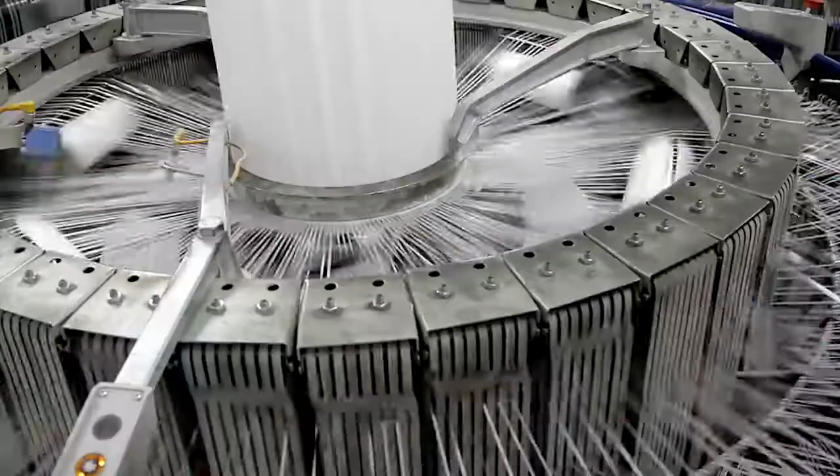Now that we've defined additive manufacturing and how it can be used, let's understand why it's truly important. In other words, why should we think differently using AM? Look around you and think of all the things that were made in factories, products from simple to complex, and imagine what it takes in terms of investment in infrastructure and time to go from the raw materials to the product arriving in your hands.

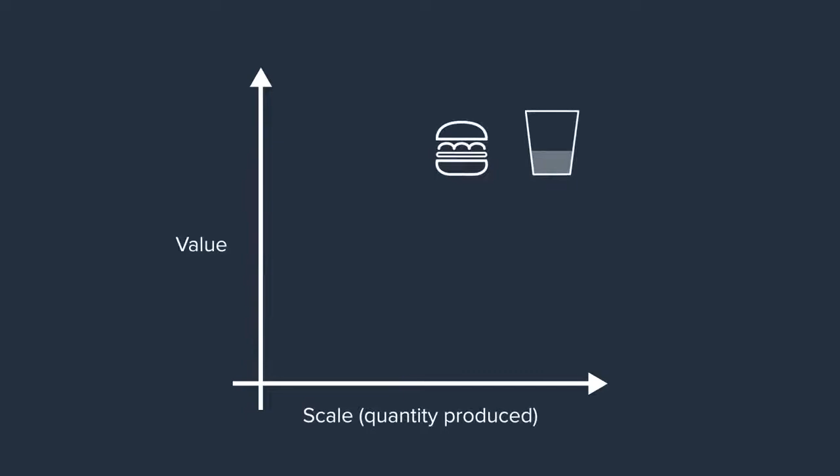I also teach the largest manufacturing class on campus at MIT, and every September on the first day of class, I ask the students for their definition of manufacturing, and then I give my definition of manufacturing as value at scale. This definition applies to bare necessities, food and water, to the most intricate electronics and advanced systems such as automobiles and aircraft that contain thousands of parts, both mechanical and electrical. And to bring those products to market, to not only bring improvements in our quality of life, but also to bring a profit to the manufacturer.

We have to manufacture in large quantities because of the investment in tooling and machines, and also the investment in design and scale-up that's needed for the producer to reach the marketplace.

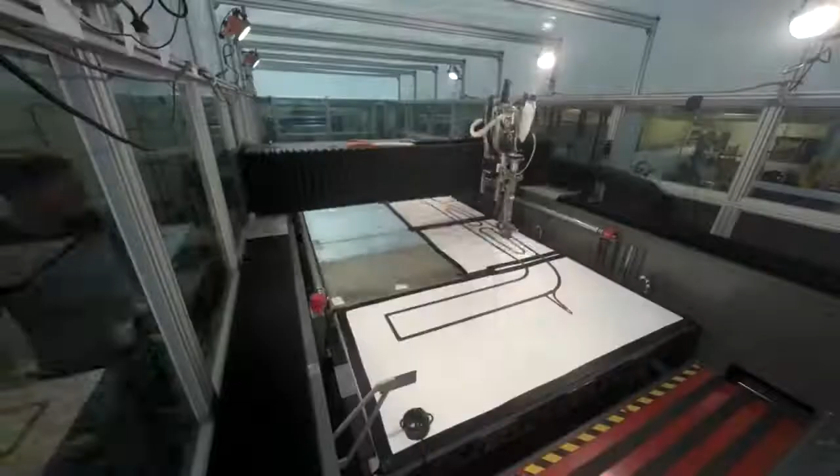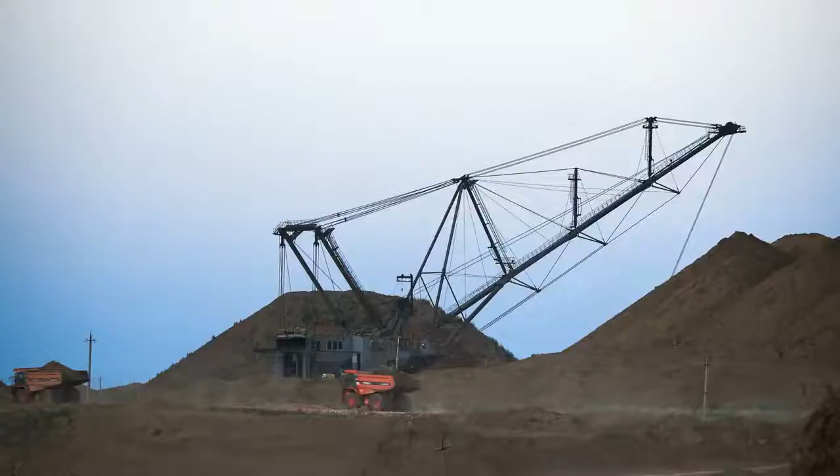Because 3D printing is unconstrained by traditional forming and machining methods, it introduces a lot of potential for savings. If you go back to aluminum billets, there's a whole bunch of energy that's put into mining bauxite and creating aluminum. And then you have to give it material properties, roll it, and then you start cutting it up into parts and pieces. There's all of these steps that happen when you really consider the life cycle of a traditionally machined part, and manufacturing from an additive perspective can really shorten that flow.

So that's why additive manufacturing is different. And further, it's widely said that AM has a flat cost per part versus volume curve. In other words, the cost per part is the same whether you produce a few or you produce many. Now that's not strictly true, but it's okay for the moment.

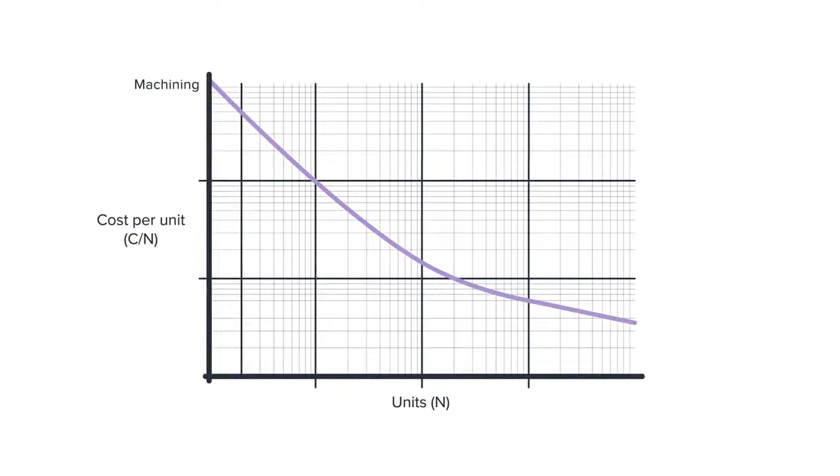For many years, the cost equilibrium point between a traditional route, such as making a part by machining or injection molding, and 3D printing it has been advancing, moving to higher quantities, and this will continue to advance, no doubt about that. So we can always compare the cost of making the same part by, say, additive manufacturing versus machining, but we can of course also leverage the design freedom that AM gives us.

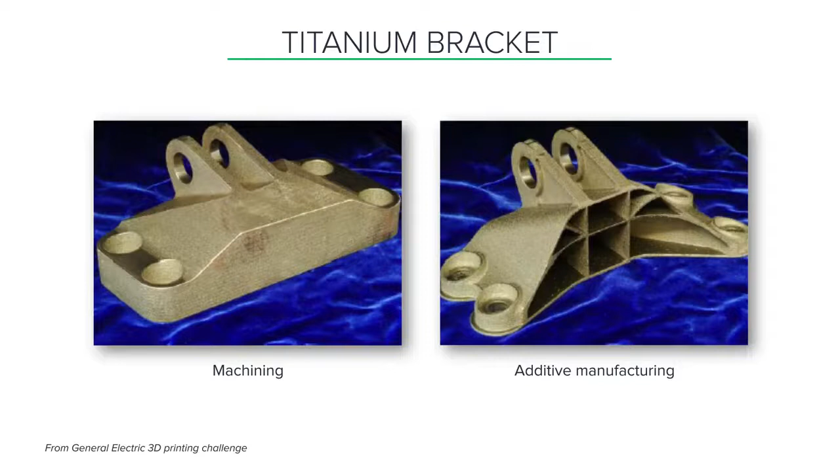A great example is this bracket for an aircraft application that was put out as a challenge by GE several years ago and got solutions from around the world. The challenge was to come up with a design for AM that saves weight and material, and the winning result among many really cool outcomes is shown here.

So for these and other designs by additive manufacturing, does complexity really come for free? That phrase is often used in the field, and I'd like to probe it in a bit more detail. So to do so, let's consider this series of parts.

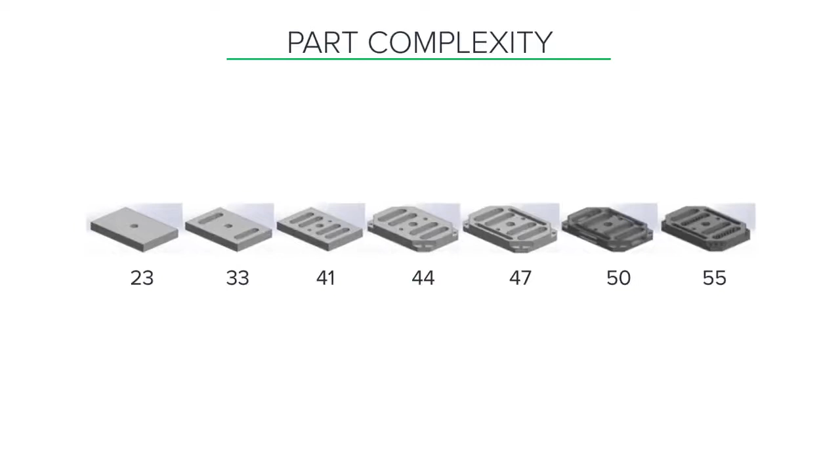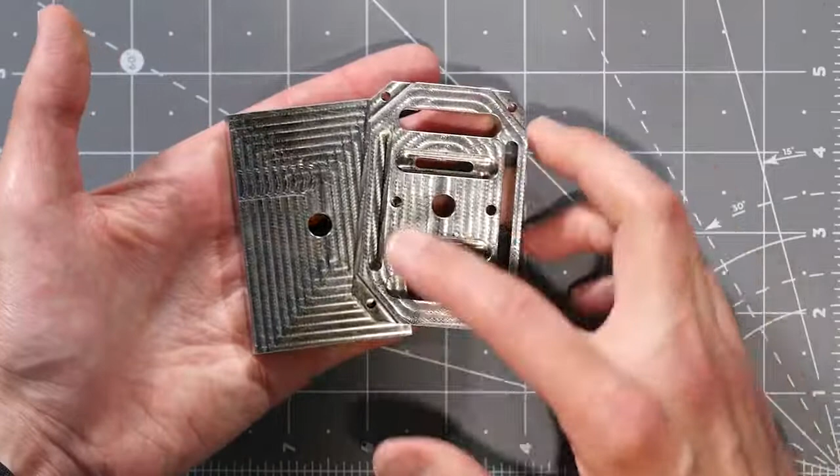The parts from left to right on your screen have increasing complexity and the same external volume, or the same bounding box. The simplest part here is a simple block with a single hole machined in the center, and the parts progress in complexity. An intermediate complexity has features of different shapes and sizes, all machined from the same orientation, from the top down. And if I ask an established machine shop to make one of each of these parts,

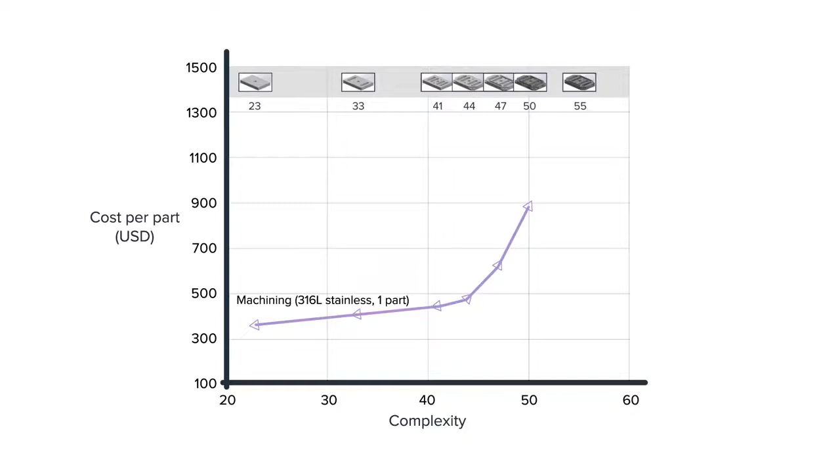I find that the cost increases with complexity. Obviously, because to create more features and remove more material by machining, I need more machine time, and I also need more involved machining operations and expertise.

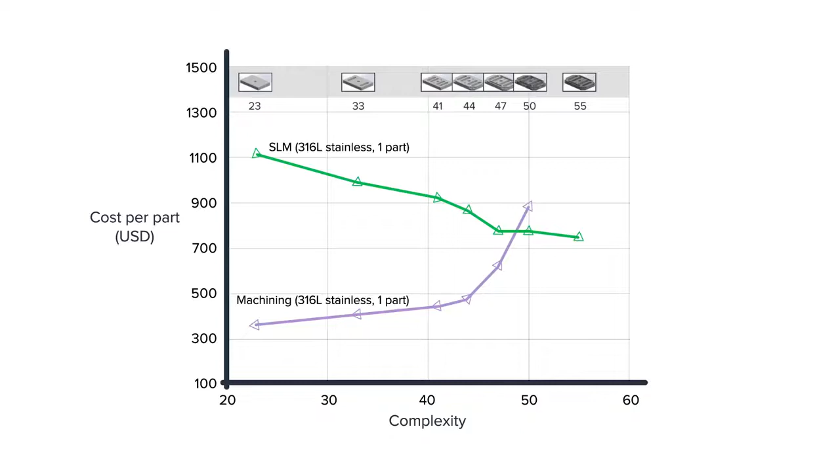But if I look at the cost of 3D printing, in this case, selective laser melting of metals, one specific process, we see an opposite trend. The cost per part actually decreases with the complexity of its shape. So for a more complex design, albeit within the same external bounding box, I need less material, and I also need less machine time to build the part using additive manufacturing.

Now if I compare the 3D printed part of the same complexity to the machined part here, we see some important differences. For instance, the surface finish of 3D printing is not as good as machining, so perhaps to make this comparison exact, I need to do some other processing on my 3D printed part.

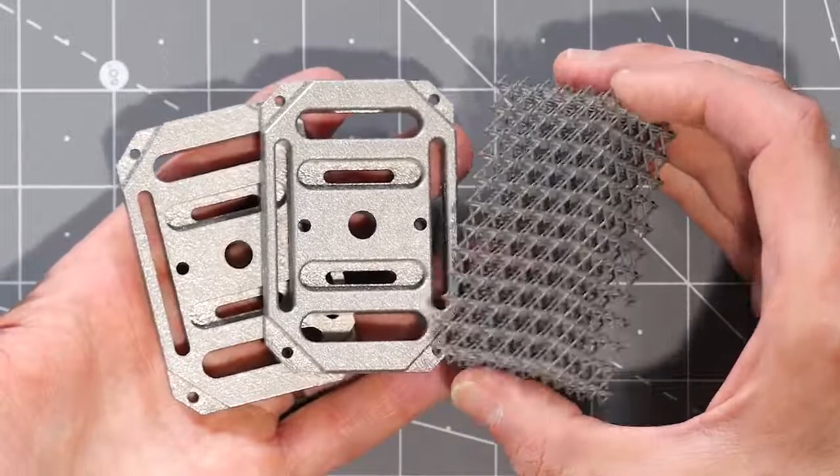But nevertheless, if I use 3D printing, I can access further complexity than I ever can with machining, and without changing the configuration of the machine, I can build features from different orientations. So here are two 3D printed parts, and this one is somewhat more complex because it has slots oriented from the side. Or inside this part, if I opened it up, it's solid from the outside, I might find lattice structure on the inside, because this is further complexity that 3D printing can realize.

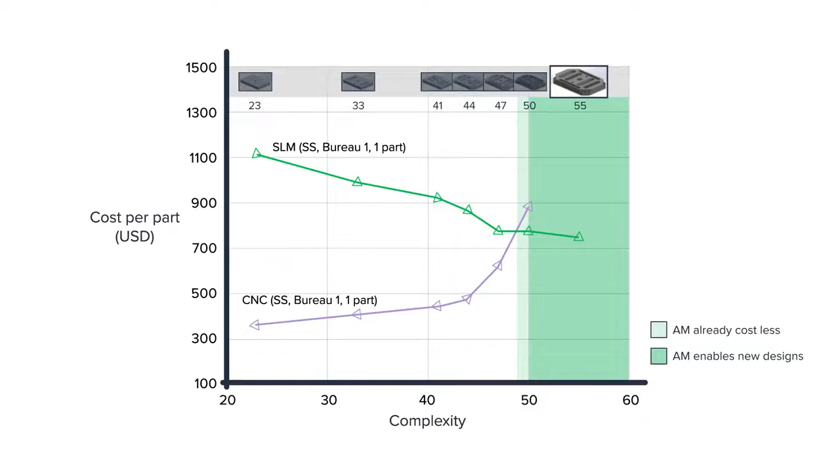This could reduce the weight of the part, and in many ways further increase its performance, and perhaps further reduce the cost of producing it. These charts show real data from machine shops we queried recently. Not only are these trends fundamentally different, but they also cross. In other words, there's an equilibrium point that says it's already less expensive to make such a part by 3D printing than machining if it has a highly complex geometry. So the value of unlocking that design space is both in cost and performance. Even more so, the most complex geometries in this example, that highest complexity index with the internal lattice, cannot be made by machining. So in a way, not only is complexity free via additive manufacturing, but it's in some words more than free. You can make complex parts for a lower cost than you can make simple parts.

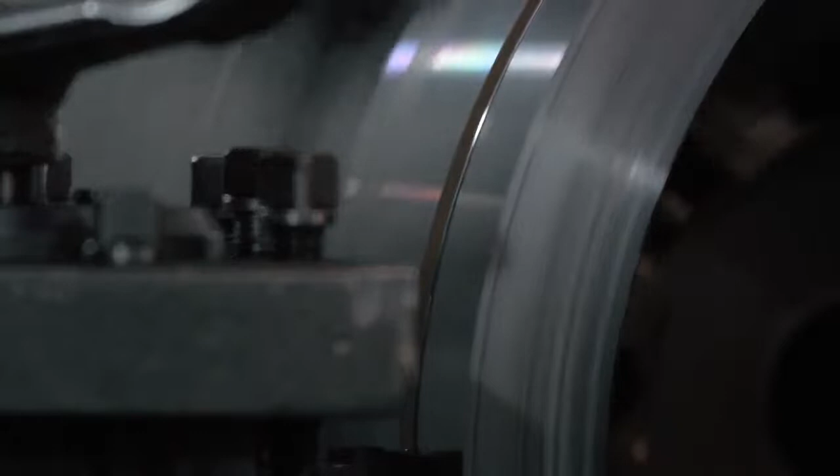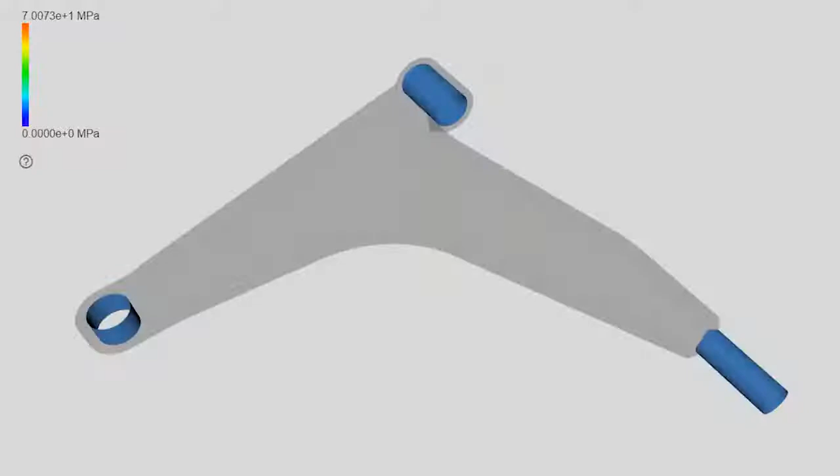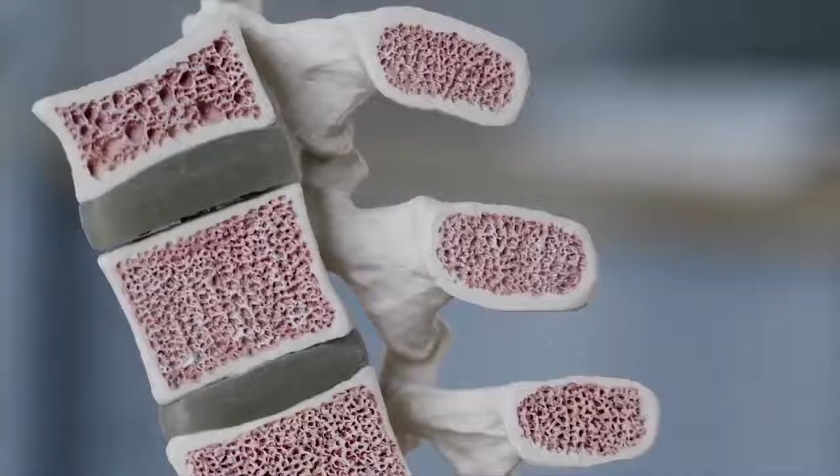For half a century, we have been fabricating parts, tools and components in a similar fashion, where we subtractively remove material and design it to the best of our abilities, but cost and complexity are traded into that equation, and it does constrain what you can do. With 3D printing, so many of those constraints go out the door. You can use software now to optimize where you put material, and you can only use the minimum amount to meet your stress and strain requirements, and the shape you might get might be something totally organic, like a spider web or a bone structure. It's patterns you would see in nature that are now going to be possible for our entire engineering team. So we'll be able to make that part, and we won't have to pay for that extra complexity.

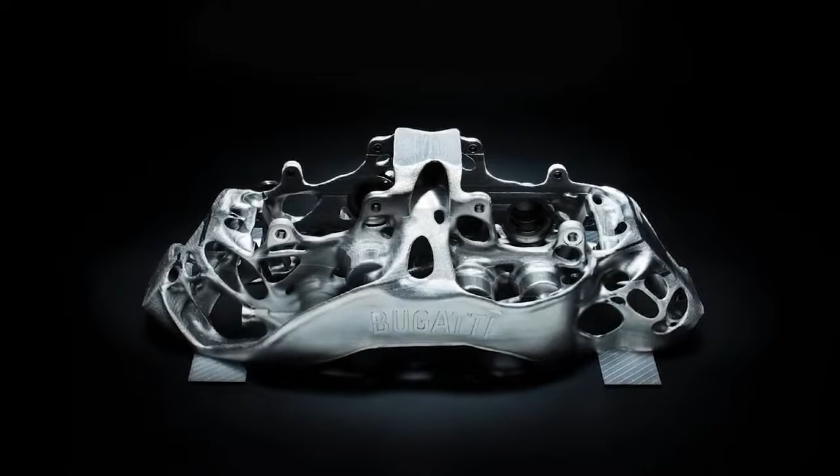A beautiful example of complexity becoming simplicity is this brake caliper. It's for a Bugatti, a high-end car, and this is a production part made to improve the performance of the brakes while reducing the weight. While Bugattis are really very high-end cars, the mainstream automotive industry is already preparing for and investing in metal 3D printing because its economics are going to get a lot better in the coming years.

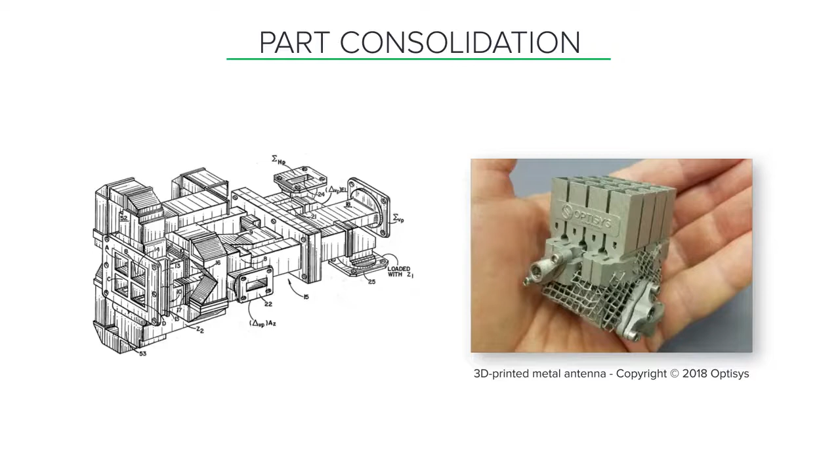AM can also let us consolidate multiple parts. This is an antenna for radio frequency, or RF beam steering, made by a company in the US. Previous designs, like shown in the drawing here, had dozens of parts, but their new design has just one part. You could only make this design by 3D printing, and it has improved performance, which can be predicted by advanced RF simulations.

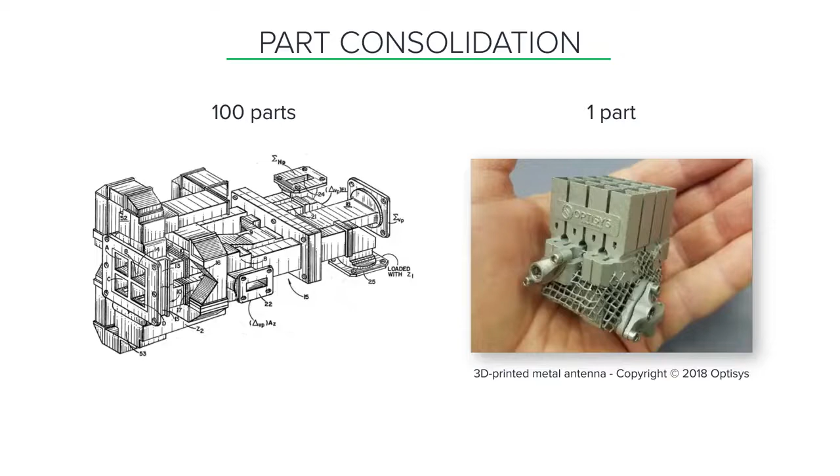Next, this is from Robot Bike Company in the United Kingdom. They make custom mountain bikes that combine carbon fiber tubes, which are very strong in tension and also lightweight, with 3D printed metal joints. The combination of these two processes and materials lets their product be possible, and also lets them customize the bikes to individual riders by cutting those tubes to length and custom 3D printing those metal bracket junctions.

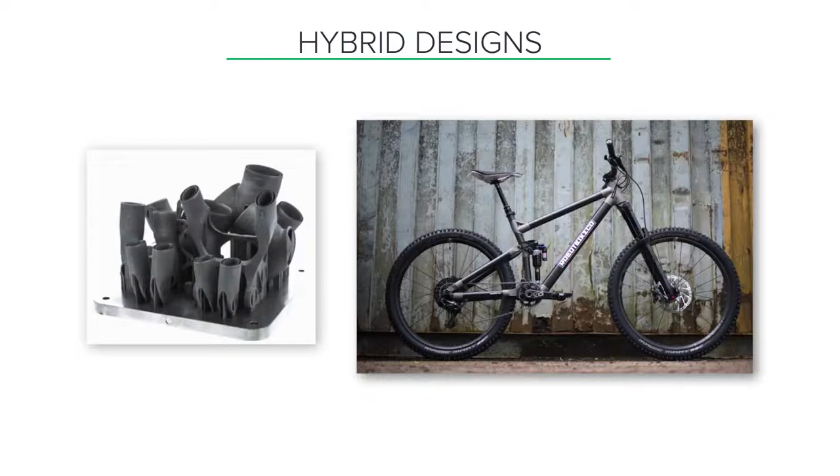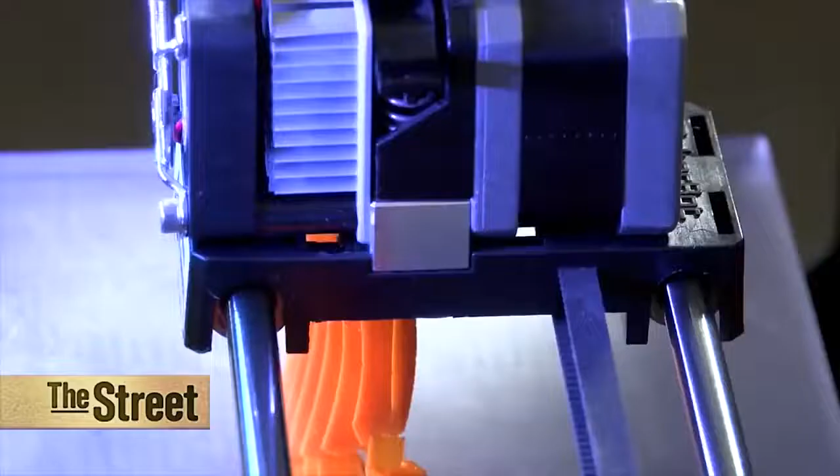So for these and other reasons, we see implications emerging over the product life cycle, from the first concept, the first idea, to the end of the product's life. Things as simple as Frito-Lay 3D printing plastic potato chips, believe it or not, as prototypes to test with their customers, to Mercedes-Benz, which is producing metal housings for temperature sensors for their Unimog vehicles, which are designed to last a long time and undergo very harsh conditions around the world. As a result, it needs service from time to time, and they're fulfilling this need at a later stage in the product life cycle.

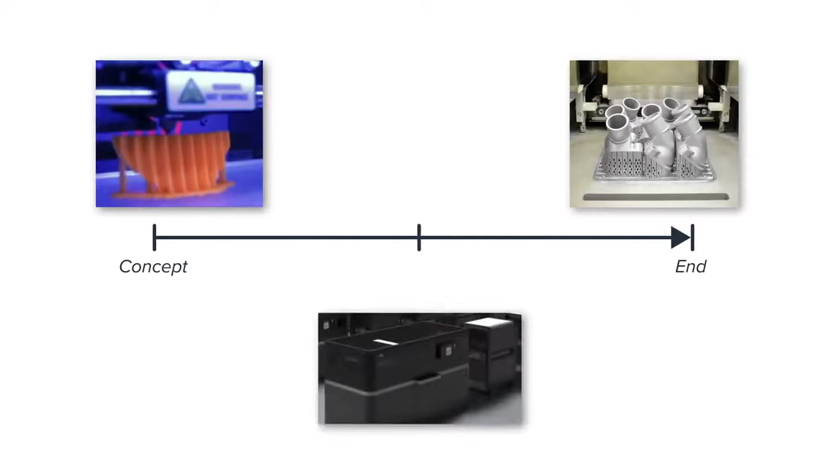And between the beginning and the end comes the heart of the product life cycle, which is mass production. Today there's rapid innovation happening in additive manufacturing to enable that mass production, and this includes improved machines and processes, lower cost and higher performance materials, and integration of AM with the workflow of product design and factory operations. Many challenges remain, but we're still gathering the momentum and resources to address those.

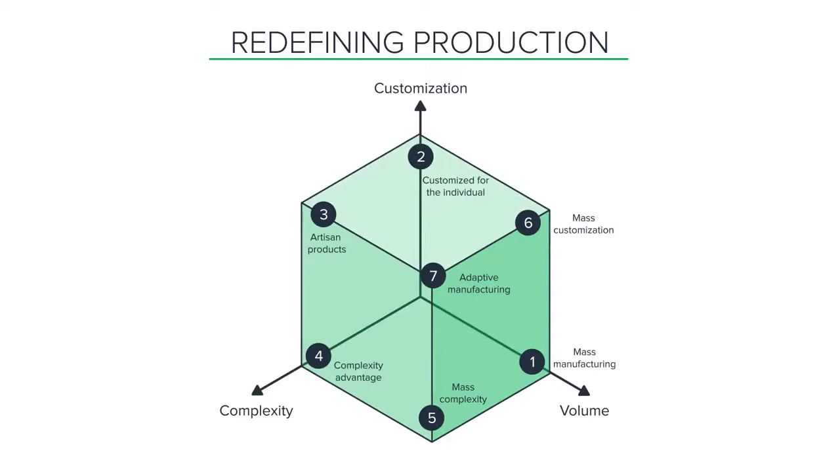For these reasons, if we go back to my definition of advanced manufacturing as value at scale, I think we can, in some ways, redefine the axes by which we judge the viability of a manufactured product. The three axes here now are volume, the number of parts we make; customization, the customization of the product to the user; as well as complexity of the part geometry. So to keep it short for now and get back to this later, I believe we can envision viable manufactured products at any point in this 3D space, all the way up to the apex, where we can create entirely new products and business models, and also engage the customer in the design process and in the supply chain in exciting and valuable new ways.